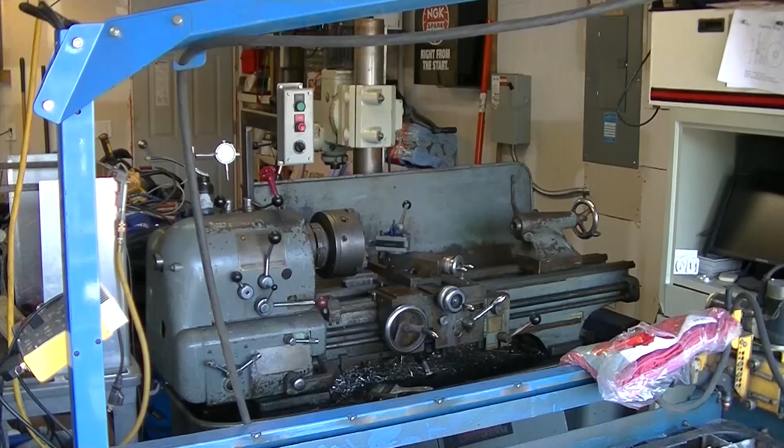Hey, Tom here. We've got some projects to do today. We've got some work we're going to be doing on the Colchester lathe. So let's go ahead and get started.

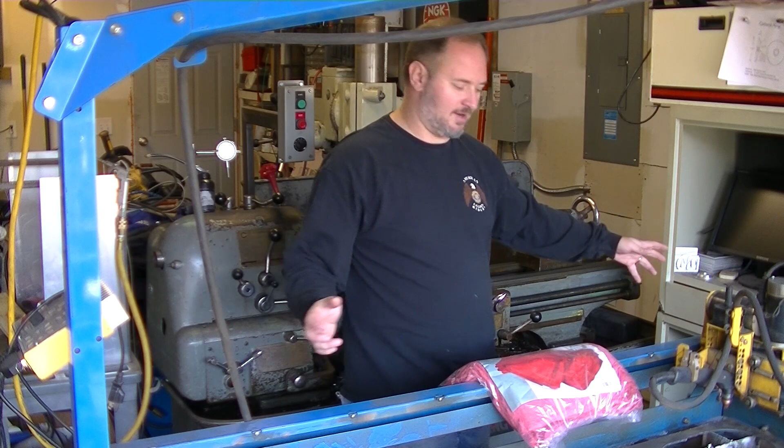As you can see, we're able to get in here now, move around, and actually work on the lathe. Having the mill on the new stand and shifting everything over is giving us the room we're supposed to have so we can work. You can see we also moved the controller for the PlasmaCAM off to my left here, which opens up the walkways and makes things a lot more logical. We can really move around and start getting parts where we need to.

One of the upcoming projects is either fully replacing this water table or making some changes to the water table and the slat system in it. The water table that I made, frankly, the distance from the top of the material to the water is too tall. It's probably closer to 7 or 8 inches, and you really need it to be an inch or two at most to capture all the dust and particles. As a result, we get a lot of dust on everything.

It helps quite a bit and keeps the sparks down, keeps it from getting all over the place, but it still generates a lot of smoke. It's very, very fine particulate, and that metal becomes almost like a sandpaper. With all the other machinery in here, the oils capture those metals and become like a lapping compound. We don't want that.

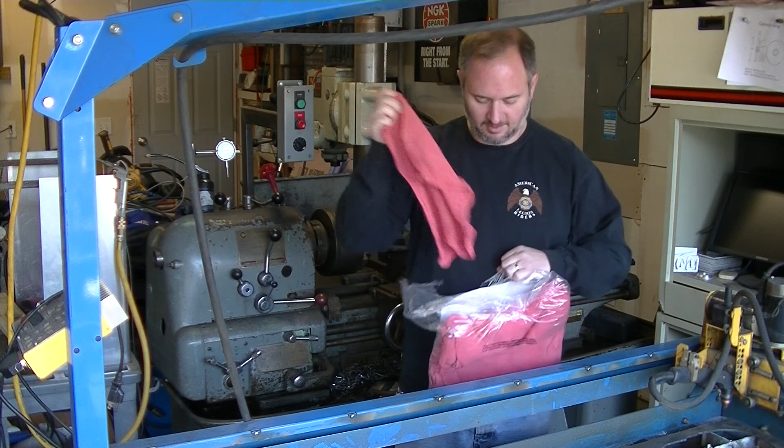I do have some projects to do today, plans are actually sitting right there. But first things first, now that I can actually get into the lathe and start using it, I bought some fresh shop towels. I need to do some maintenance on it. I'll probably bring the shop vac around and vacuum good, but all the moving parts need to be cleaned. The nice part is they were oiled well, so they're not rusting on me, but I don't want that grit in there.

At some point in the near future we'll be doing a full service on the lathe again. I never really got the lathe fully up and running at the old shop before we had to move, so I want to do an oil change. Check that the levels are fine, the oil's in there -- it's not like I'm running it dry, but I'd rather run it with good, clean oil that I know.

So both the gearbox and the headstock, and the actual gearbox itself here, we'll need to do oil changes and services on. Otherwise, everything's been fine. I'll bring you back in a little bit.

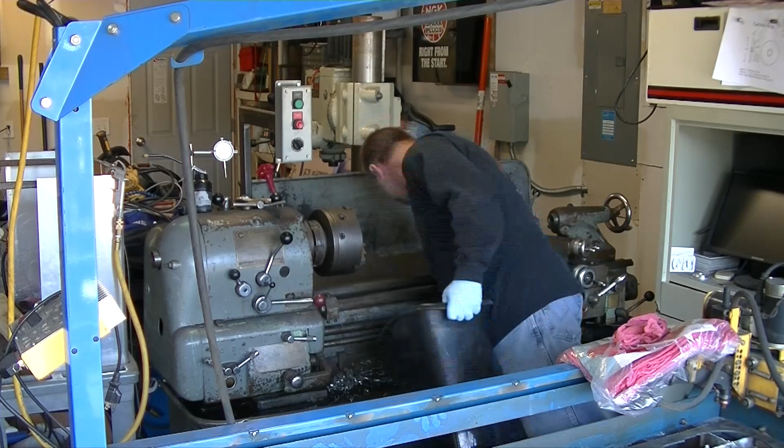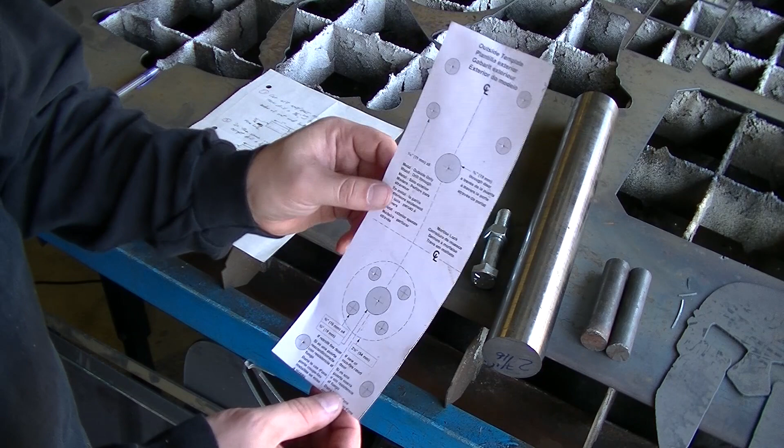Alright, let's take a look at the drawings here that the customer provided us, along with some of the material they provided. Effectively, these are templates that they use -- it's all washed out, I don't know if you guys can see it, but it's basically a paper template for drilling. It's for security doors, to put the equipment on the security doors. So what we're doing is helping them with this.

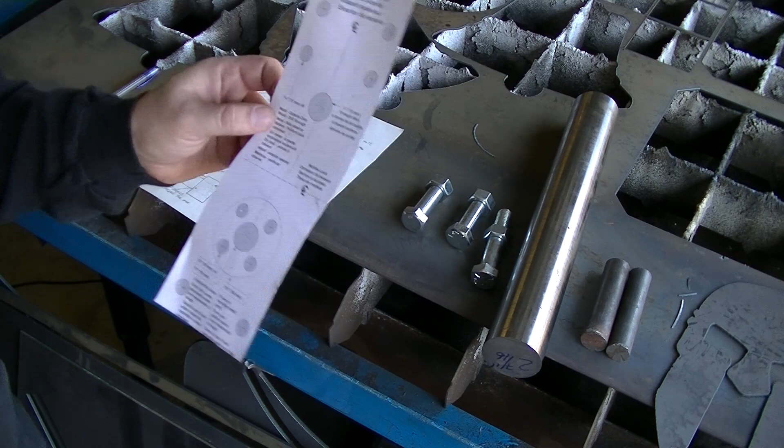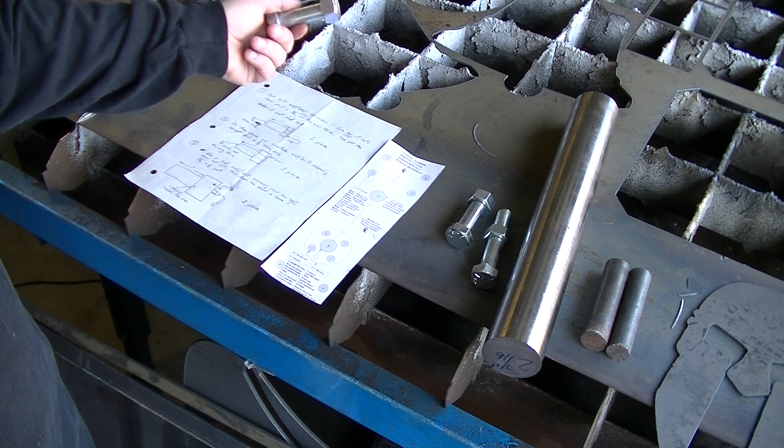What they want to do, they're going to use a 3/16 inch plate. We're going to weld -- or actually I'm not doing any of this, I'm just doing the turning part of it -- but basically the idea is to take these parts, weld the nut or weld nuts, I guess, that's the idea, and we're making drill guides.

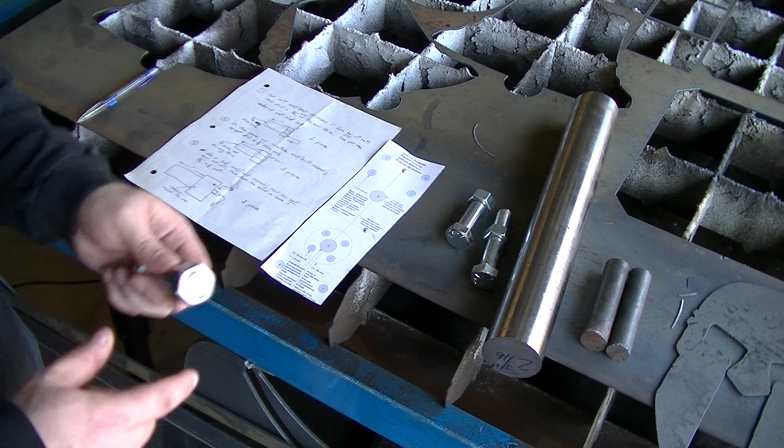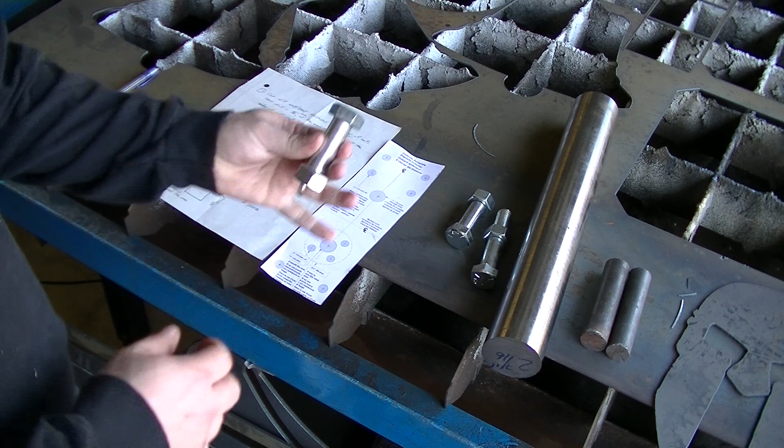So what we're doing is making drill guides that are interchangeable. The idea being that for all of these, we'll have a nut that's welded to this plate. This bolt will actually get cut off at, I want to say, 1 inch from the nut face, the face of the nut, out 1 inch. And then that'll be bored 7/16, and then we'll do another one that's 1/4 inch. So you can basically unscrew it and put it in the place that you want to go.

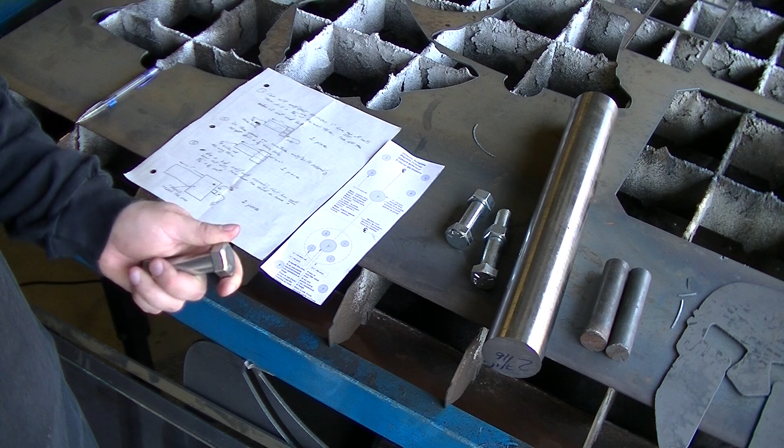Me personally, I would probably just do it once, or put 4 of these in here, but that's what they want -- 7/16 on these parts. I think there's an optional 1/4 inch one, which is the reason why they want to be able to swap things out. So we're doing one with 7/16, one with 1/4 inch. And then this long one -- the idea is to turn this down to remove the threads.

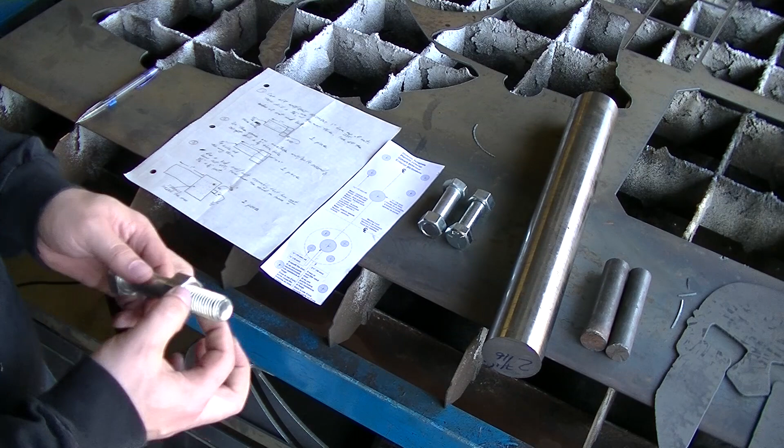It looks like they want a 3/16 inch long register that is 1/8 inch in diameter. So they can use this one with the nut, put a nut on, register it on the part of the metal, and then weld it. Then they can take this out and do it again, so it helps them register the parts.

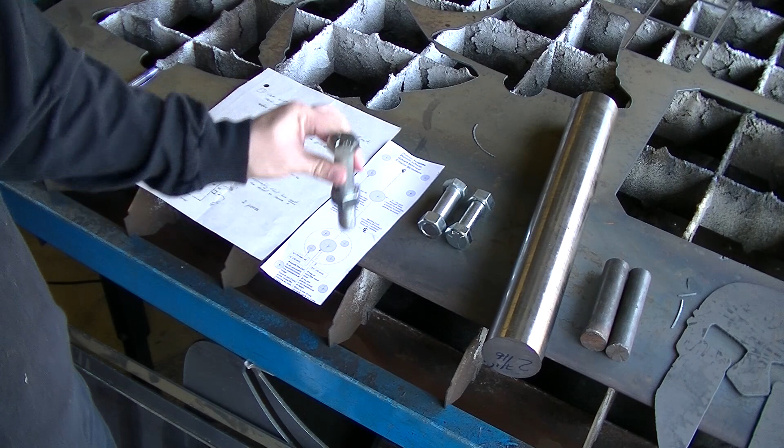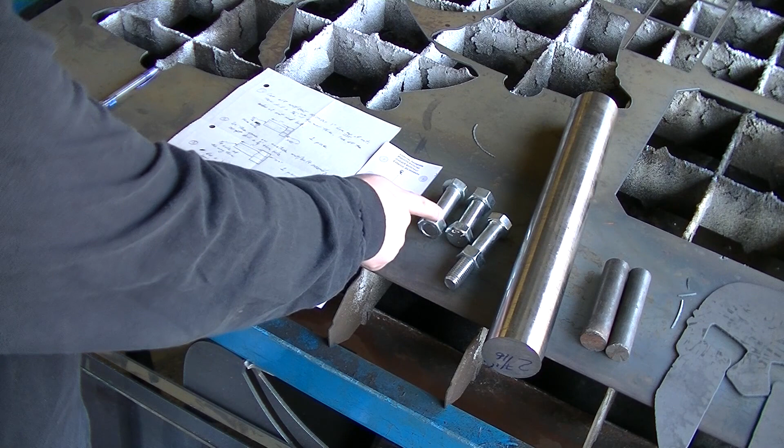I'm making this for somebody else. Personally, the way I would have done this, if it were just for me, I'd take this drawing, put it on the PlasmaCAM, cut 3/16 with the holes in place, and do oversized holes so they would register in there. I could just turn a small register and weld the parts directly on and be done. But that's the requirements they have, that's what they want, so that's what we're going to do.

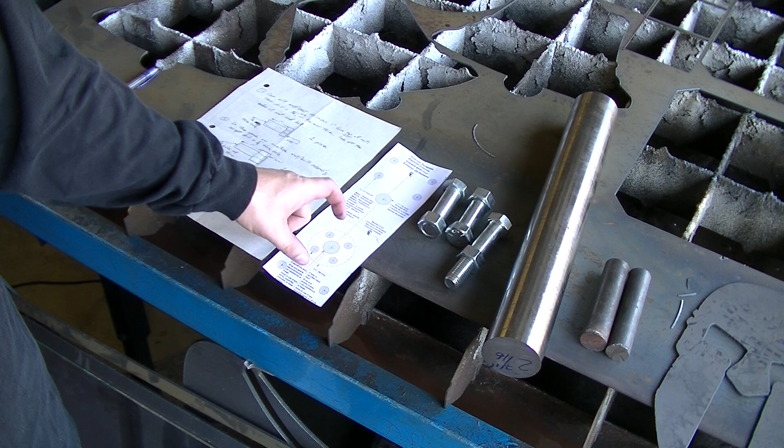The other part to this, originally we were going to do all these as separate parts, but on my recommendation I actually got them to do this as one piece. So this guy here, we'll turn it down to diameter and poke some holes in it. This is shaft steel, I guess, and it will get welded on there as well. So they can go that route.

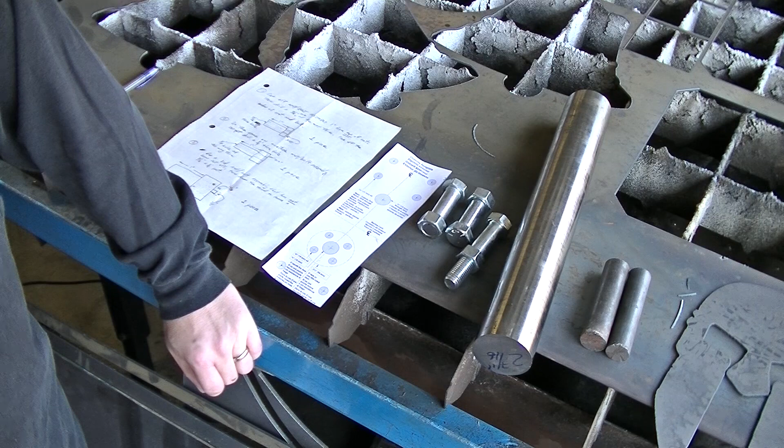It should be fairly straightforward to do, because this 3/4 inch hole here, I gotta figure out a way to get them to register it properly for them. So let me think about that too. But anyways, that's what we're working on today.

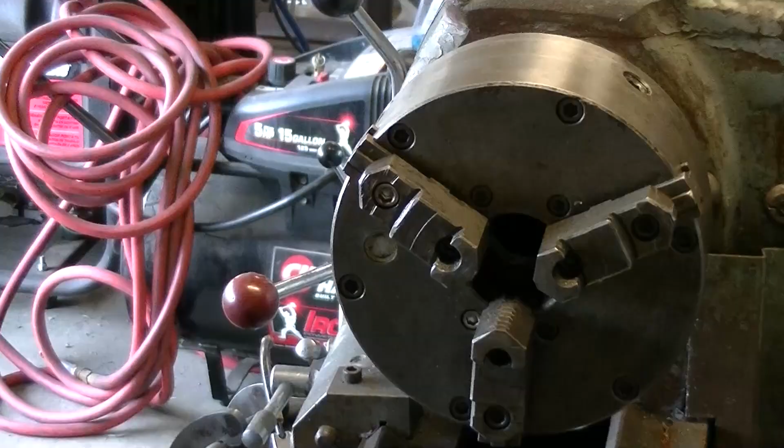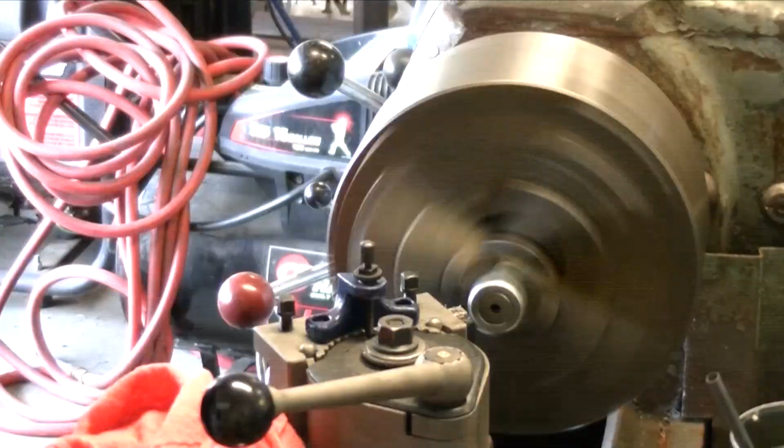Rather than have you listening to a bunch of squeaky audio, I decided to do a voiceover here. As you can see, we're just going through and parting off the bolt head and then getting it to length, because we're really just using the threads. We had an overall length here of 1 inch past the threads, facing it off, and then doing some simple drilling operations. We had 2 of these to do, one at 1/4 inch, one piece there, and then one at 1/2 inch. We did the drilling, chamfered all the edges, then flipped it around once it was ready to go, put the nut back on it, and faced everything nice and true, because we wanted to make sure the hole was going to be perpendicular to the nut, or to the face of the metal.

Yeah, light chamfer on the hole. This one is done. Yeah, it's not even warm. Nice.

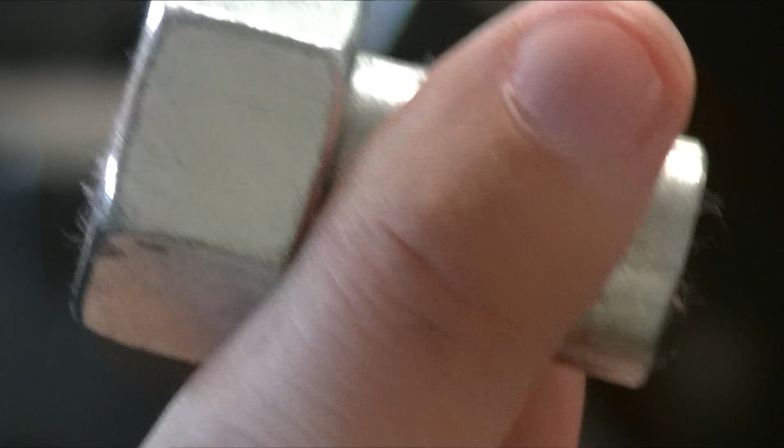Being that I do welding too, it kind of killed me a little bit to be putting oil all over this, knowing that it was going to get welded. But effectively, you can see here that face will get welded, but he'll take this out and put a sacrificial bolt in to get it registered. We do want to keep this as a pair.

Alright, I'm going to work on the other one and I'll bring you back.

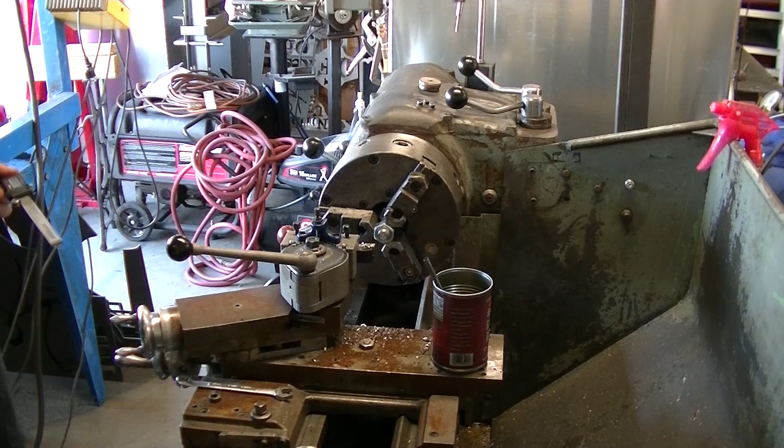Alright, I got started on the next part. I've already cut it to length, and now I'm creating the shoulder, or the register here for this guide. The print calls for 1/8. So I was actually just coming in to check, so we got our micrometers here.

572. We got a ways to go. So let's get back at it.

Alright, more lathe work at super speed. We'll take a closer look here at what we're doing. I'm doing all the feeding by hand, trying to get this down for that pin, down to an 1/8 inch. One of the things I was doing in all this is getting a better feel for how tightly I can do my tolerances and what the readout on the dials actually was doing for me, because I'm still really getting a hang of using this new lathe, and I'm loving it.

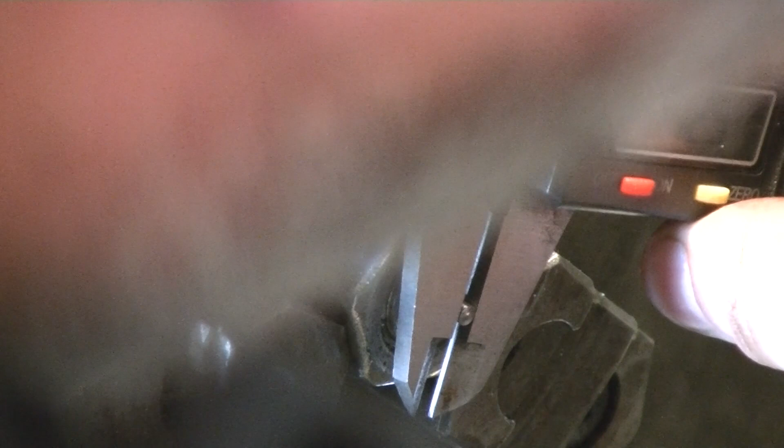Oh, why do I feel like I just blew this up? Oh, oh, oh, oh, you guys see that? I'm half over. Wow, nice.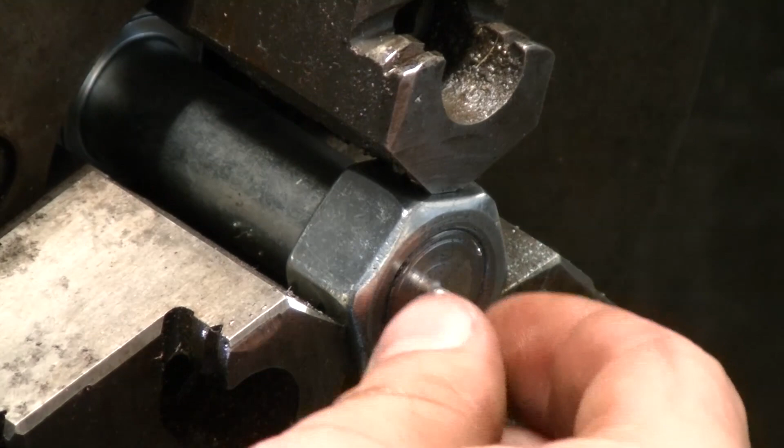What I don't like is I really feel like that register is not big enough. That's what they were calling for though, this is me working to print. This is a friend of mine who's doing the fabrication. I'm going to call him up and talk to him about this. That register, I mean that pin, it's probably fine, it's actually probably too long. It really just needs to center, right? So it only needed to be 3/16 of an inch long, and I'm hair over 1/4, so a little on the long side. But that's what he asked for, so I'll bring it up to him and it'll be his decision to make.